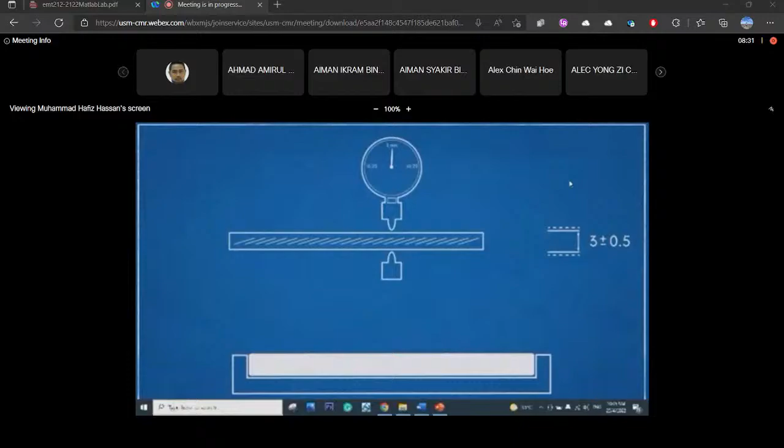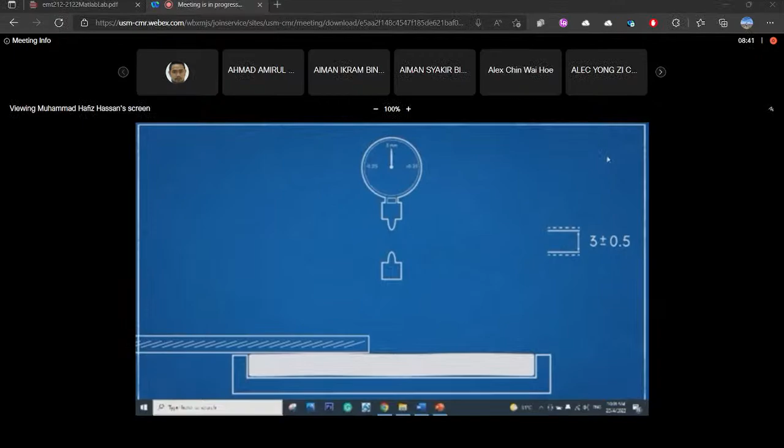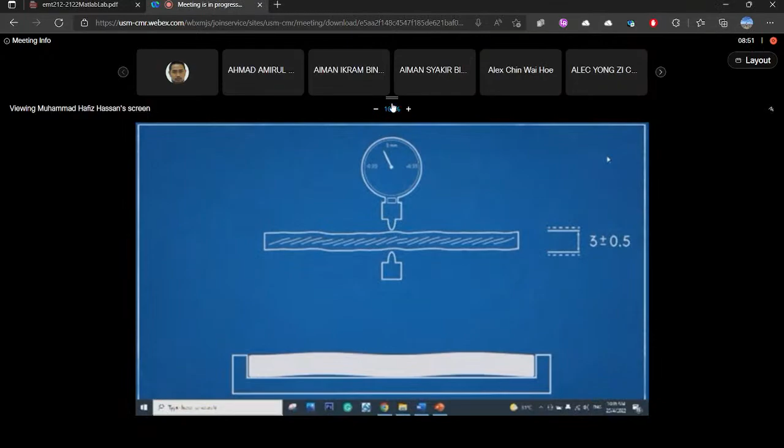As long as it is 3 millimeters thick plus or minus the specified tolerance, the sheet passes. But what if during the process of moving the floating ribbon of molten glass, a subtle disturbance is introduced to the molten metal? Let's say this disturbance imparts a quarter of a millimeter wave-like undulation throughout the entire ribbon. Now to the eye, the cut sheets would appear flat and would pass quality checks for thickness, but the surface of those sheets of glass are far from flat.

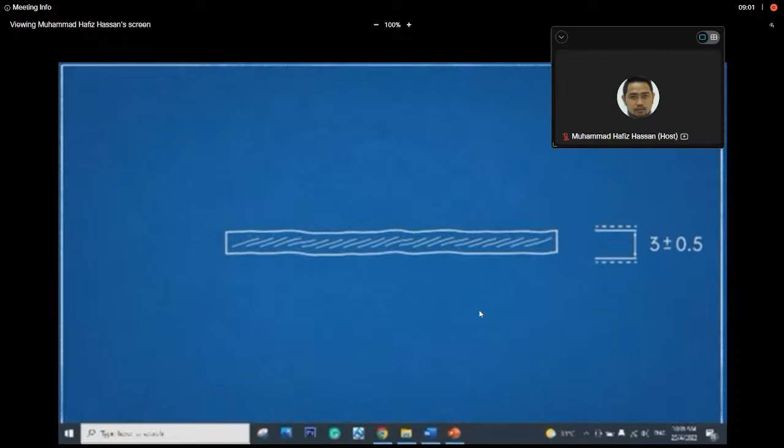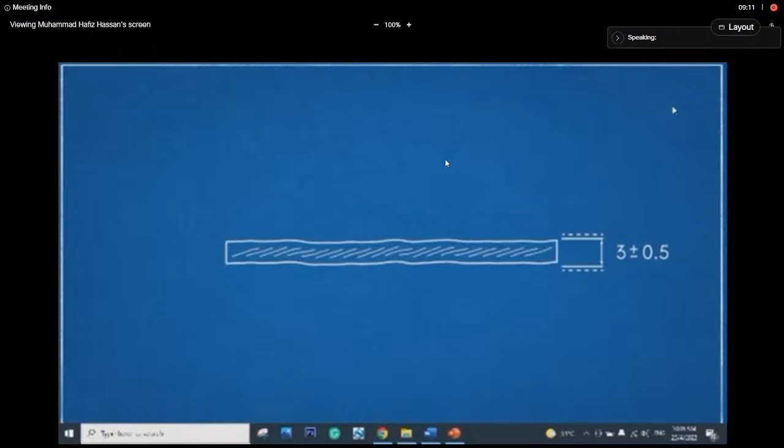Flatness isn't derived from how closely a part matches its specified dimensions. It's a property completely independent of the part's gross shape. Parts can be made completely dimensionally compliant, yet still lack flatness on its features. Because of this, the flatness of a surface is specified independently of other dimensions.

If we take a surface and sandwich it between two imaginary parallel planes, the gap between the planes that encompass the surface is known as a tolerance zone. The distance between planes in this tolerance zone is how flatness is specified. The smaller this distance, the flatter the specification. If the surface's irregularities can't fit within the tolerance zone, it's not flat enough for the specification.

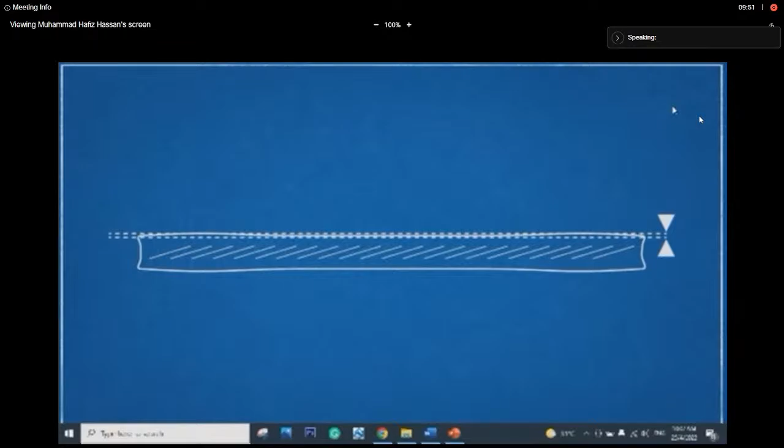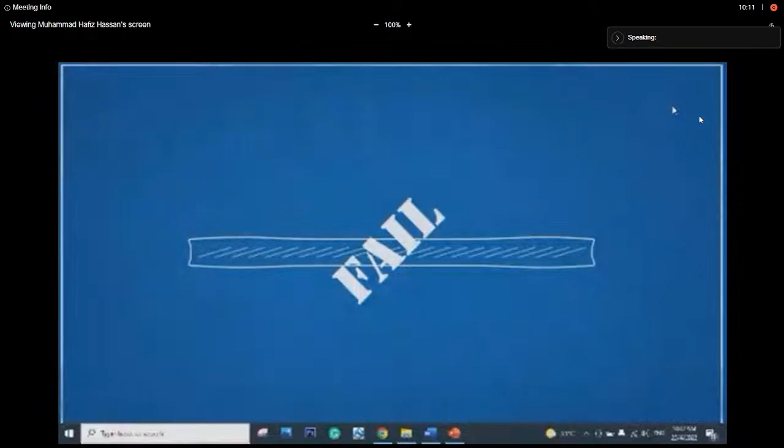Flatness is in effect the difference between the highest and lowest point of a surface and its relationship to a specified tolerance zone. It is possible to force flatness on a surface without explicitly specifying it by tightening the dimensional tolerances of a part. For example, if we made the thickness tolerance of our float glass to be plus or minus 0.1 millimeters, it would cause the sheets affected by the undulations to be rejected during quality control. However, this practice can create dimensional specifications that may be impractical or cost prohibitive to meet for some parts.

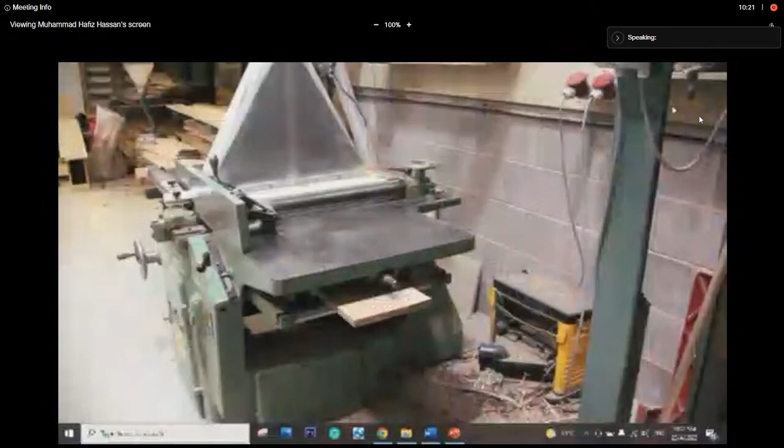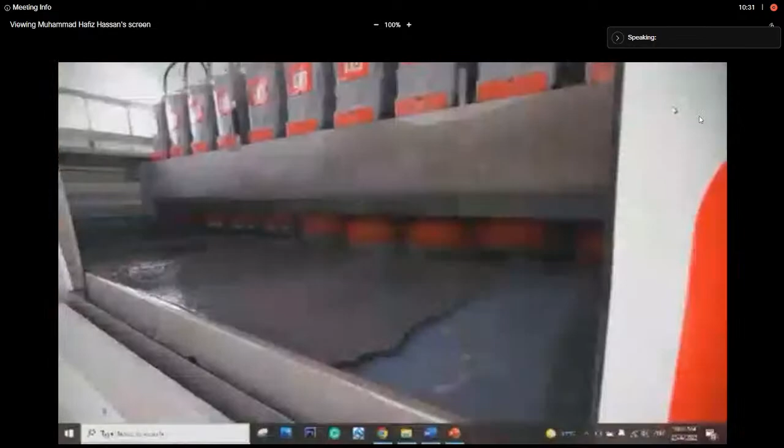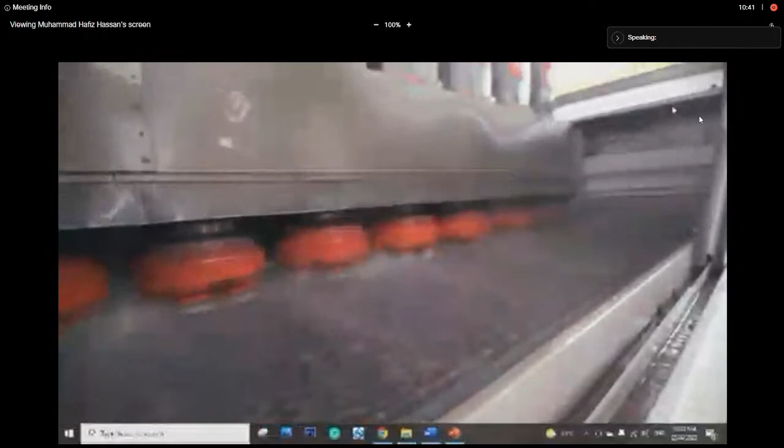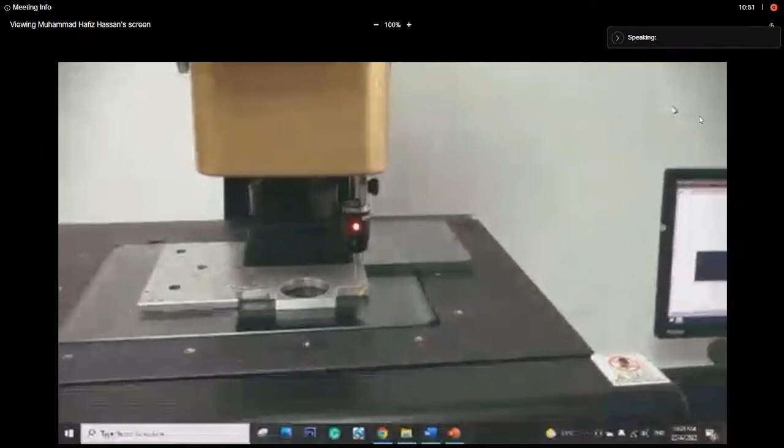On parts that do explicitly define flatness, the method of both measuring and producing flatness is determined by how tight of a tolerance zone is required. Adding to this, some specifications may even specify a maximum allowed change per area of surface, preventing abrupt changes to the overall flatness of the entire surface.

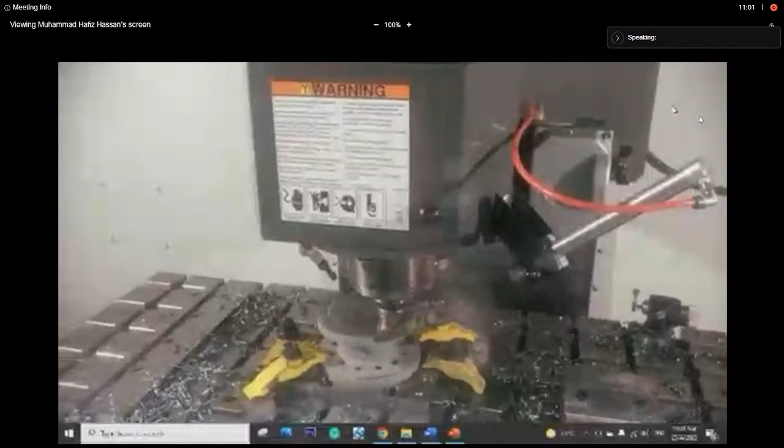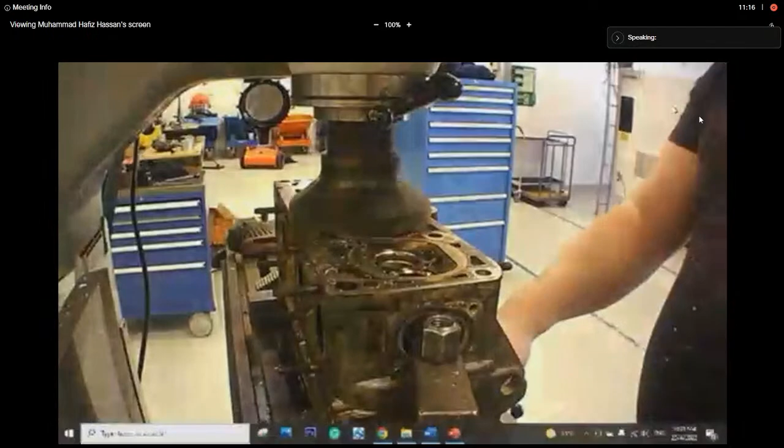Flatness specifications down to around 10 microns, or about 4/10,000ths of an inch, are quite common in machinery, found predominantly on part mating surfaces. At these tolerances, traditional milling can be used. For larger faces, tooling designed for milling flat faces such as face mills and fly cutters are common. Those mating and sealing surfaces found in car engines can be found at this level of flatness.

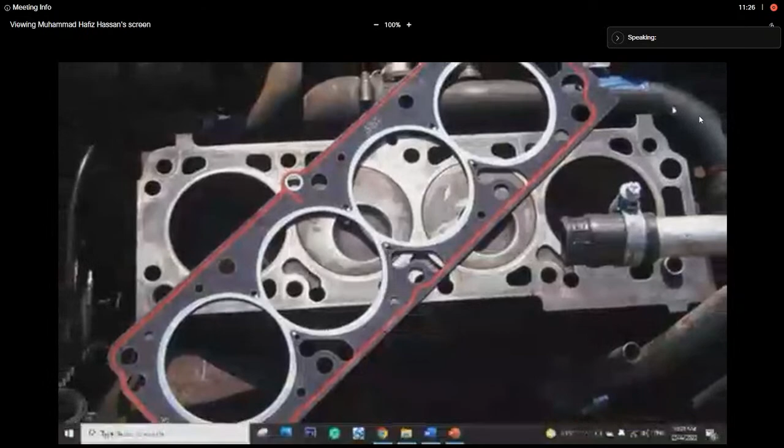Sealing in fluids at this level of flatness requires the use of a gasket. A gasket is a mechanical seal which fills the space between mating surfaces while under compression. Gaskets allow for less than perfect mating surfaces on machine parts where they can fill irregularities. They are usually made out of compressible materials such as paper, rubber, silicone, or metal.

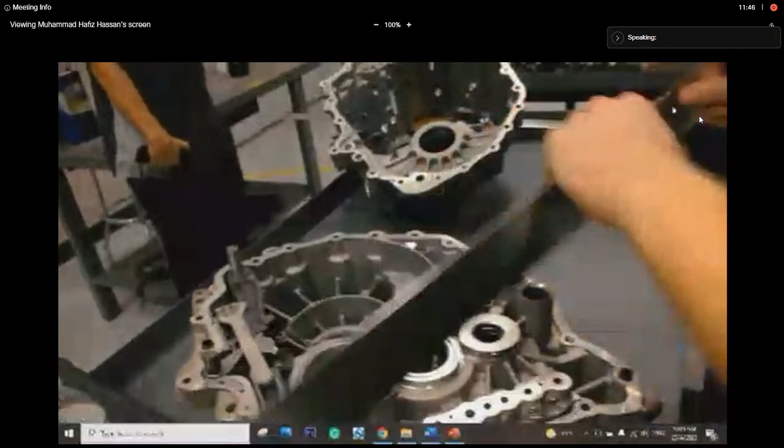Field testing flatness at this level is done with a known precise flat edge and clearance probing tools such as feeler gauges. The flat edge is placed at several positions spanning the surface to be tested, and a feeler gauge at or above a maximum allowed deviation from flatness is used to probe the clearance between the surface and the flat edge, offering a simple part usability flatness test.

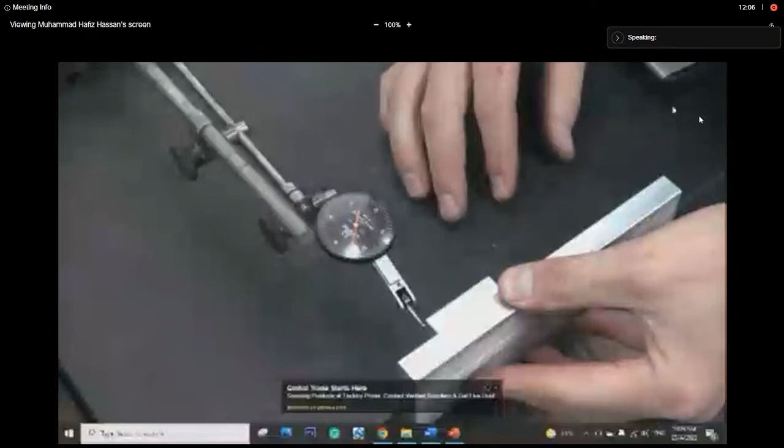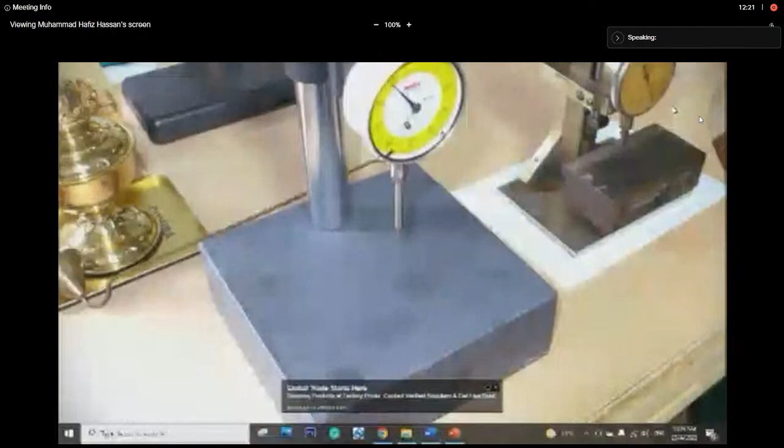Actually measuring the flatness of a surface is a lot more complicated. An obvious solution would be to measure the surface against a flat reference. For example, if a part has a surface parallel to the surface to be measured, it could be placed on a surface plate. A surface plate is a flat plate used as the main horizontal reference plane for precision inspection.

A height gauge can be used to probe the top of the surface for flatness relative to the surface plate. However, the problem with this method is that you're really only testing how parallel the surface is to the surface plate and not actually testing for flatness. Furthermore, not every part can be fixtured in this method. Because flatness is a property that's independent of other dimensions, it must be measured in an independent manner.

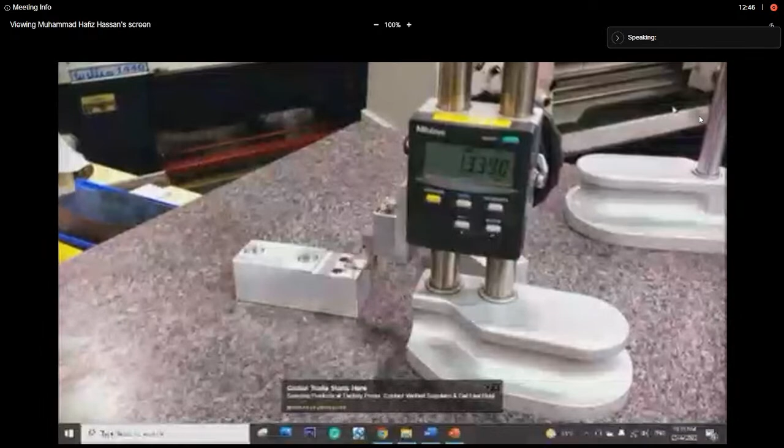If we first place the part to be measured upon 3 columns with adjustable heights, then with a height gauge run the probe along the surface while looking at the amplitude of the probe needle, we get a snapshot of the differences between the highest and lowest point on that surface.

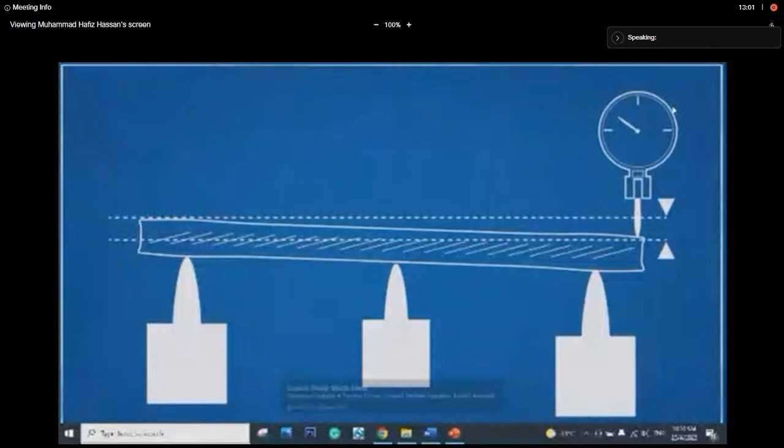We then adjust the 3 columns to minimize the amplitude of the needle. The goal is to adjust the orientation of the plane in order to come up with the smallest difference between the high and low spots on the surface. This smallest possible range of travel is the measure of the flatness of our surface. In effect, we're reconstructing the tolerance zone sandwich of the surface.

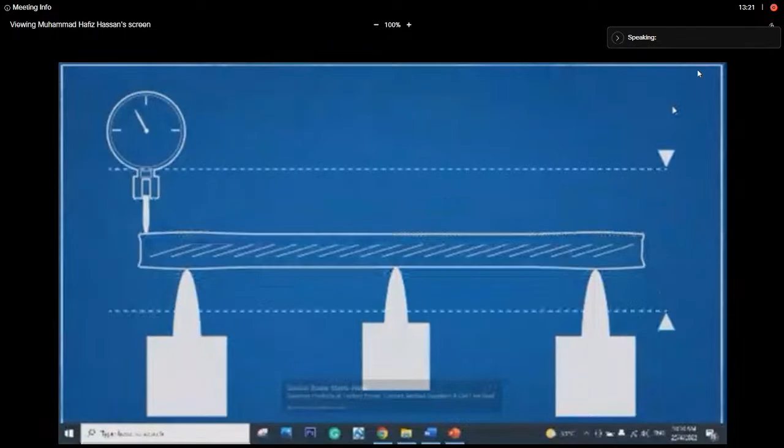Measuring flatness manually requires significant training and experience, and it can be a very tedious procedure. Automating the process with the use of a coordinate measuring machine, or a CMM, is a common practice.

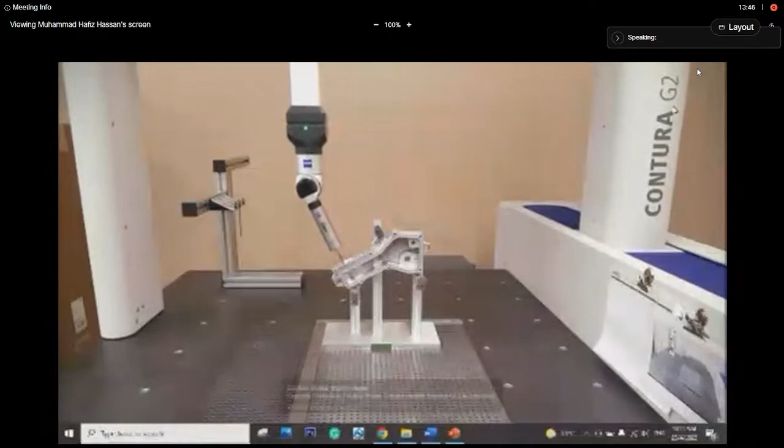A CMM is a device that measures the geometry of a physical object by sensing discrete points on the surface of the object with a probe. CMMs are typically computer-controlled and can be programmed to perform the tedious, repetitive measurements needed to determine surface flatness. The probe is programmed to sample the location of the surface within the CMM's working space at numerous points.

The resulting data, known as a point cloud, is then processed through an algorithm known as the minimum zone method. Two theoretical planes are calculated that best sandwich the point cloud, effectively determining the tolerance zone of the surface.

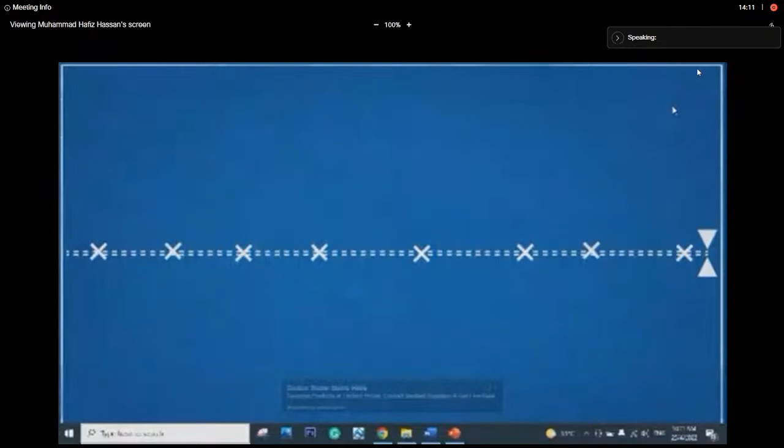Because the aligning of the surface is done in software, measuring flatness with a CMM can be done very efficiently with minimum fixturing. CMMs are generally accurate down to about 2.5 microns, or 1/10,000th of an inch, making them ideal for use with milled flat surfaces.

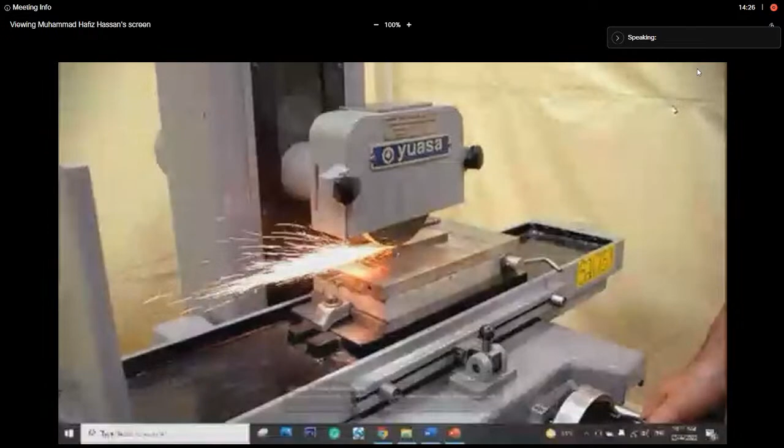Going beyond the 10 micron level of flatness requires the use of surface grinding. It's a widely used abrasive machining process in which a spinning wheel covered in rough particles cuts chips of metallic or non-metallic substances from a workpiece, making it flat.

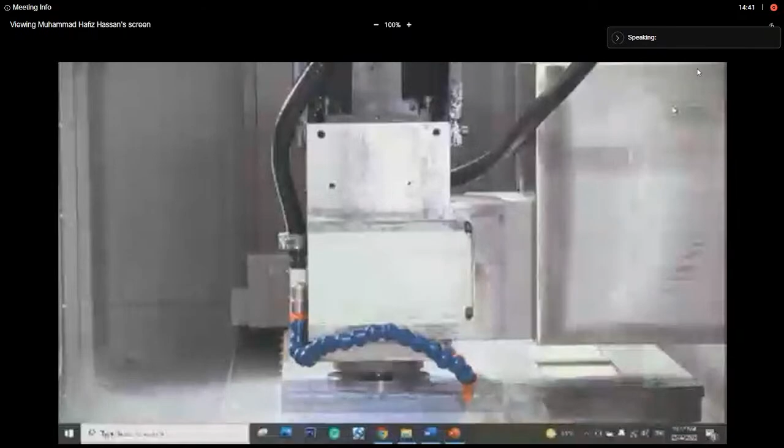Grinding is commonly used on cast iron and various types of steel. These materials lend themselves to grinding because they can be held by the magnetic chuck commonly used on grinding machines, and they do not melt into the wheel, clogging it and preventing it from cutting.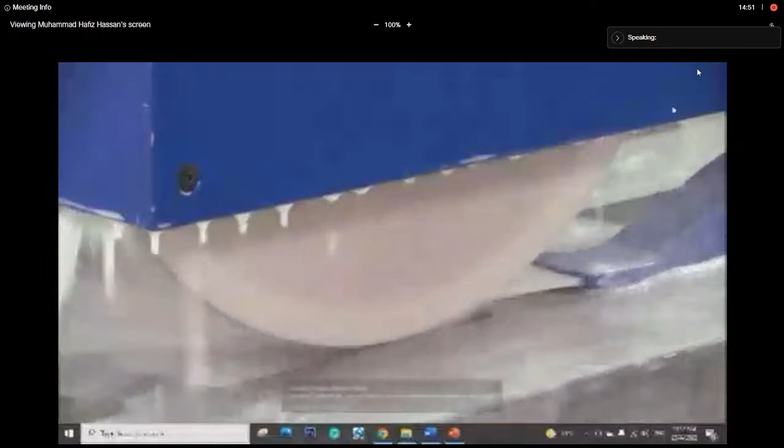Surface grinders can easily produce flat finishes down to about 2 microns of surface variance. This process is typically used to produce precision parts, precision fixtures, measurement equipment, and tooling.

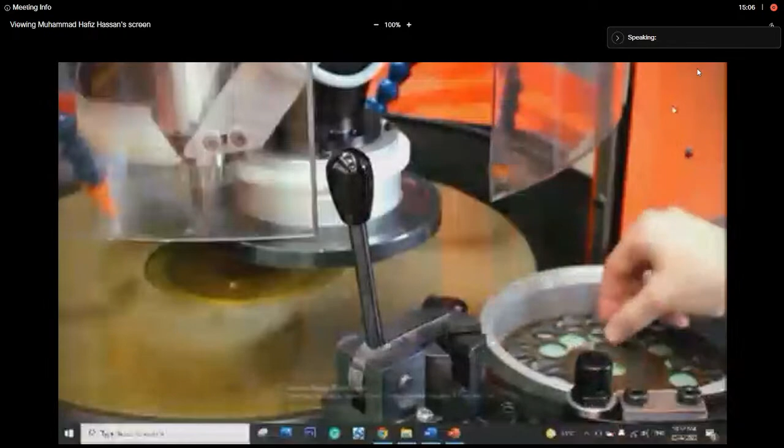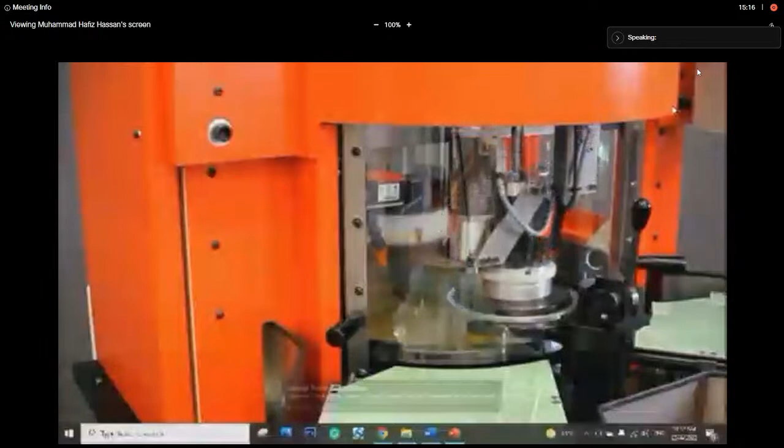Similar to grinding, face honing is a process in which a large working wheel with a thin layer of abrasive is used to grind workpieces held in a carrier disc. Face honing allows for the grinding of multiple small parts at once and is commonly used for ceramic tooling inserts, watch windows, LED wafers, bearing rings, gears, cutting knives, and carbide tooling.

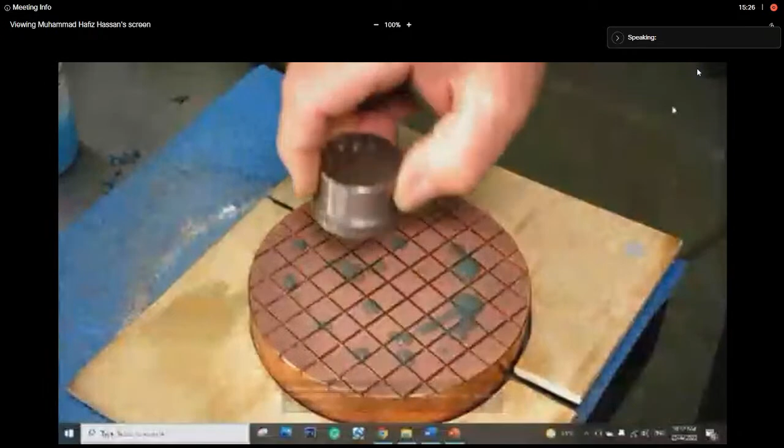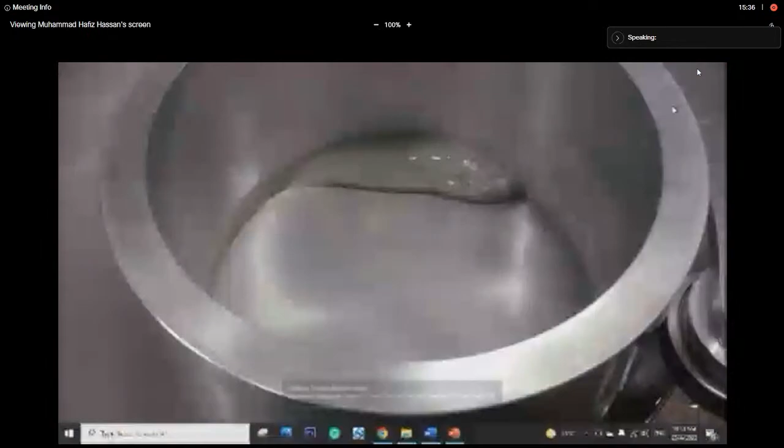When extremely flat surfaces are required beyond what grinding is capable of, lapping is used. Lapping is the process of rubbing two surfaces together with an abrasive between them in order to remove material in a highly controlled manner. In lapping, a softer material known as a lap is charged with an abrasive.

The lap is then used to cut a harder material. The abrasive embeds within the softer material, which holds it and permits it to score across and cut the harder working material. Lapping can be used on a range of materials from metals to ceramics and glasses.

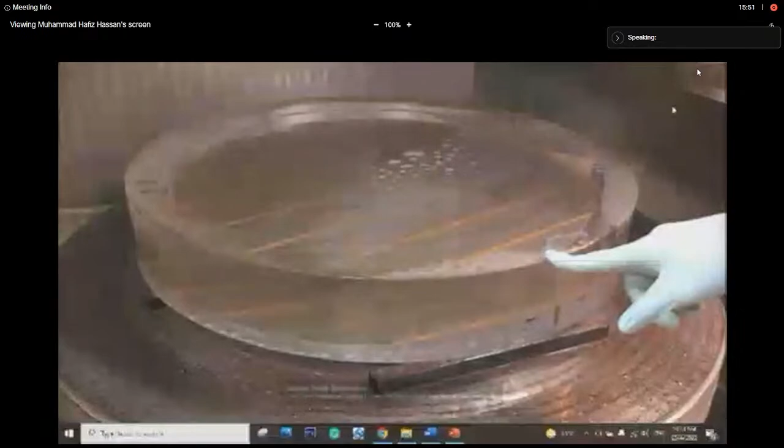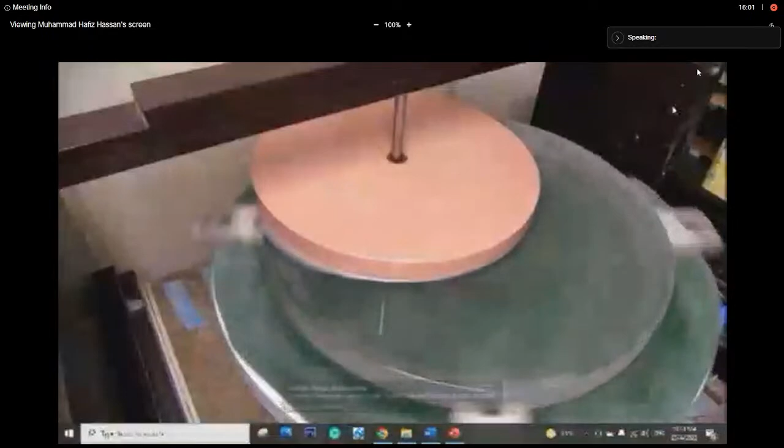At its limit, lapping can produce surfaces that vary by only 30 nanometers, or about the height of 300 hydrogen atoms. It can be performed by specialized machines or by hand, and the process can accommodate sizes from tiny handheld parts all the way up to large optical pieces found in telescopes that can take months to produce.

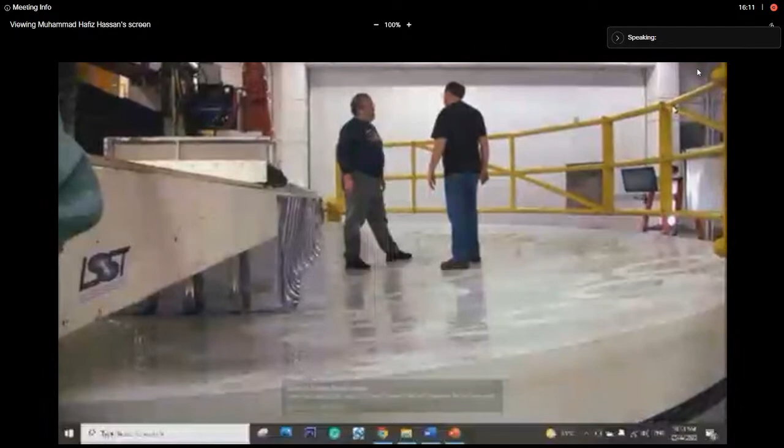A curious phenomenon that occurs when surface flatness approaches 1/10 of a micron is called wringing. Wringing is the sliding of two ultra-flat faces together so that their faces lightly bond. When wrung, the faces will adhere tightly to each other, requiring a significant amount of force to separate them.

The exact mechanism of why this occurs is unknown, though it's believed that molecular attraction starts to occur when the two very flat surfaces are brought into contact. As flatness gets into the nanometer scale, the force-reducing effects of surface roughness are removed, and full contact bonding actually becomes possible purely by intermolecular forces such as van der Waals forces, hydrogen bonds, and dipole interactions.

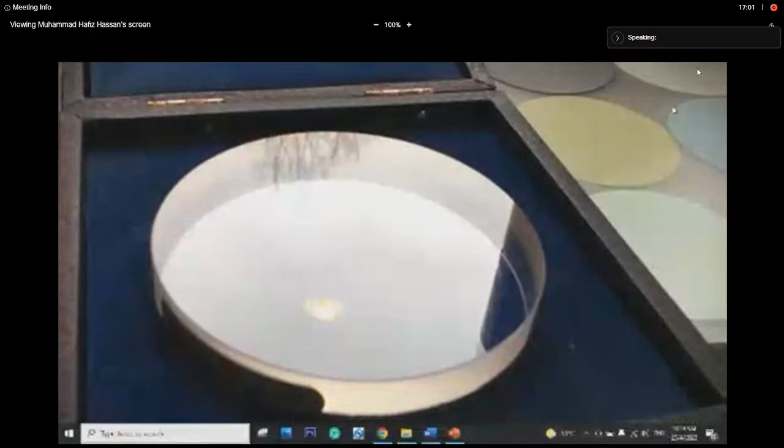This technique is used in an optics manufacturing process known as optical contact bonding. Measuring the incredibly small surface variances at this level of flatness is nearly impossible to do with direct surface contact, so optical methods are used.

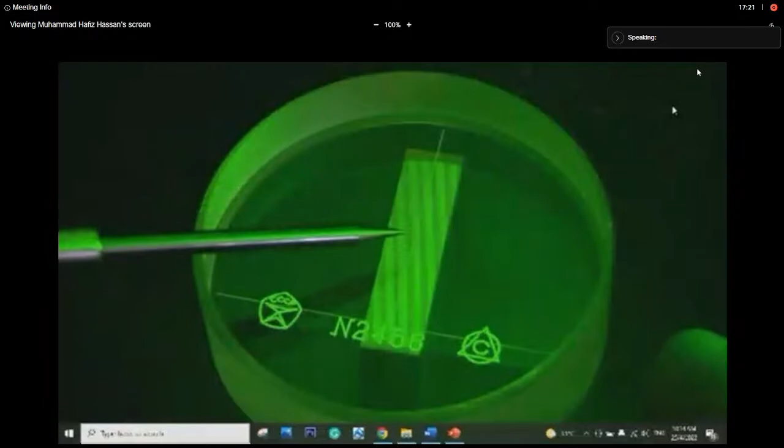In order to accomplish this, the interference pattern created by light reflecting off the surface to be measured is used. This is done by using a special precisely polished flat lens known as an optical flat and a monochromatic light source of a known wavelength. Common sources are low pressure sodium lamps or a helium neon laser.

When an optical flat's polished surface is placed in contact with the surface to be tested, dark and light bands are formed when viewed with monochromatic light. These bands are known as interference fringes, and their shape gives a visual representation of the flatness of the surface being tested. The surface flatness is indicated by the amount of curve and spacing between the interference fringes.

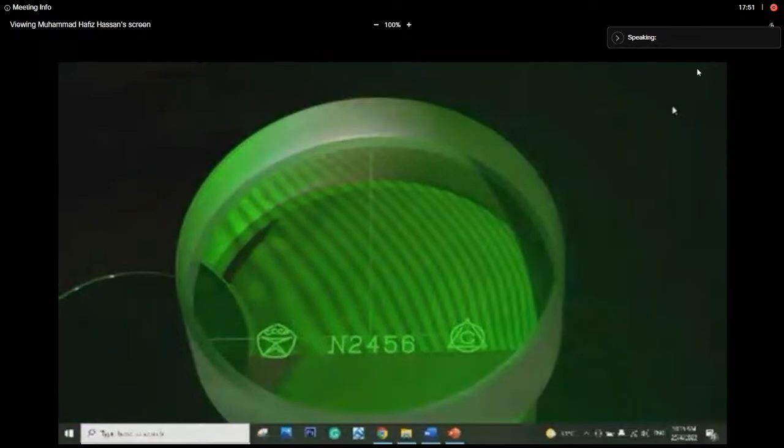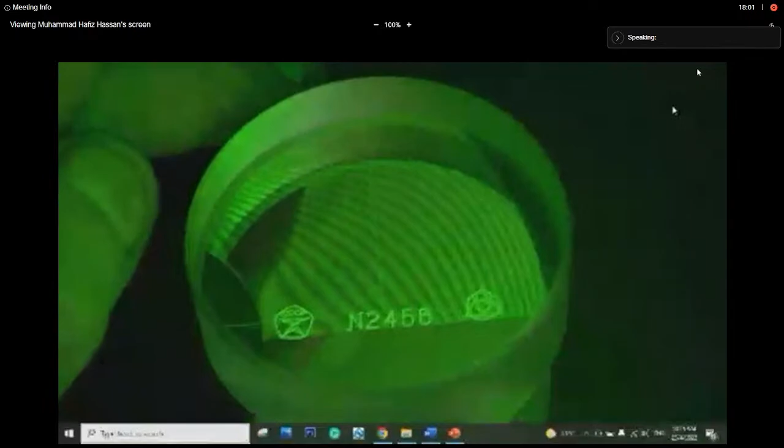If an imaginary line is run through the optical flat, each band of curved interference fringe it intersects represents a half wavelength of variance in the surface at that region. For example, if the light source has a wavelength of 600 nanometers and the imaginary line intersects 3 bands, the surface flatness for that area varies by 900 nanometers.

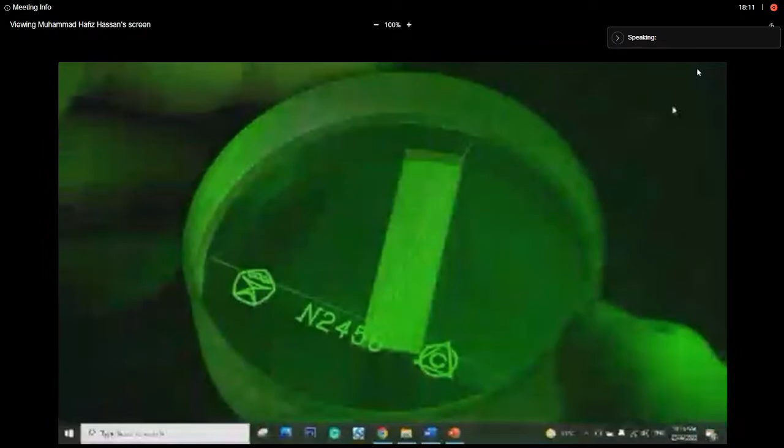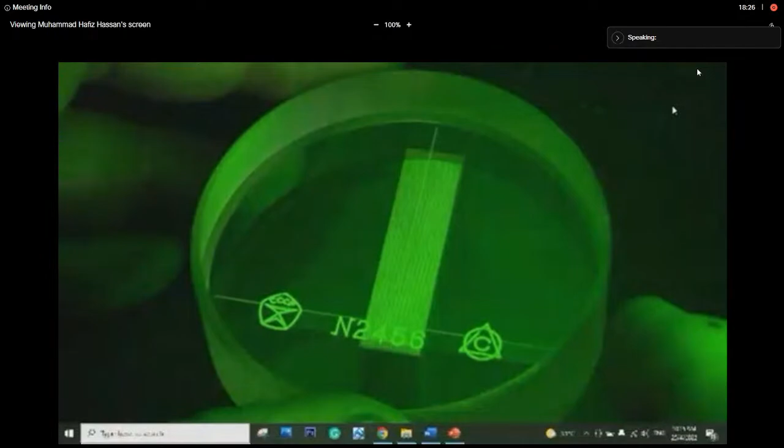Furthermore, the direction of the curves represents whether the surface is concave or convex. Straight, parallel, and evenly spaced interference fringes indicate that the work surface flatness is equal to or higher than that of the reference surface. Some optical flats can even create band divisions anywhere from 1/4 of a wavelength down to 1/20th of a wavelength, allowing for flatness resolution down to about 30 nanometers.

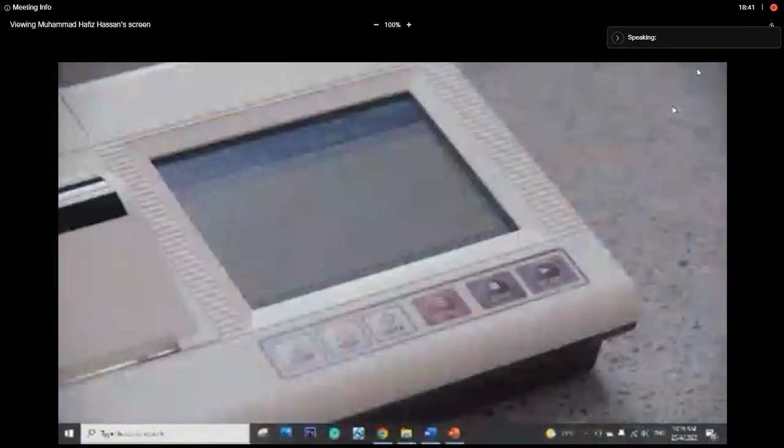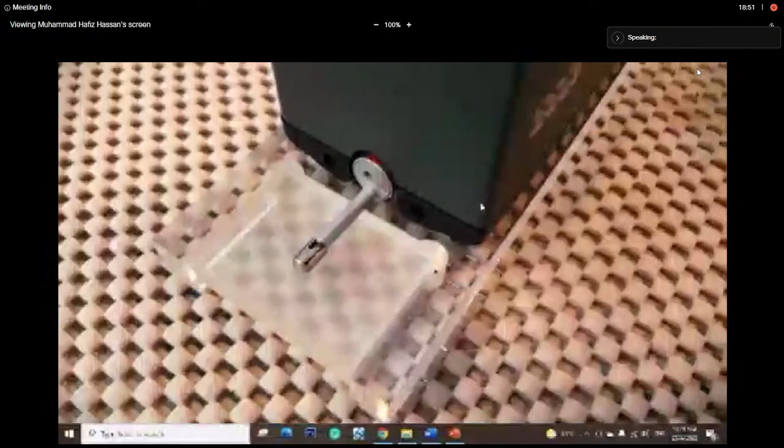Both grinding and lapping can be used to achieve a subtly different property of surfaces known as surface roughness. Surface roughness, like flatness, is based off the peaks and valleys of a surface. Surface roughness, however, measures how much the average of a surface's variance deviates from the intended surface. Surface roughness can also be specified for any shape, not just flat surfaces.

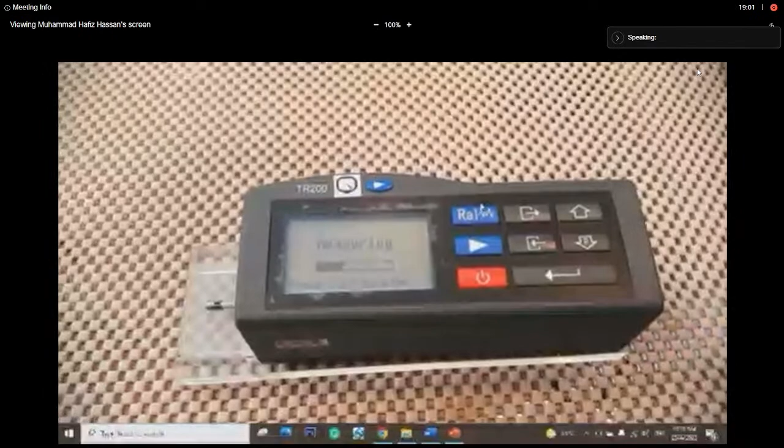In general, surface roughness specifications are far smaller than those for flatness. They typically exist in the submicron range, but as flatness variance approaches extremely small levels, the two properties may begin to converge. Perfect flatness near or at one atom of variance is possible but is beyond the scope of mechanical means.

At these levels, mechanical flatness gives way to chemical deposition and thin film technologies. Direct manipulation of atoms with scanning tunneling microscopes can even achieve perfect surfaces by manipulating them one atom at a time. At these scales, the definition of flatness quickly becomes moot.

Okay class, I think we only have 15 minutes. So I just want to summarize what flatness and straightness are according to the video I just showed. So just a very brief overview of the topics today.

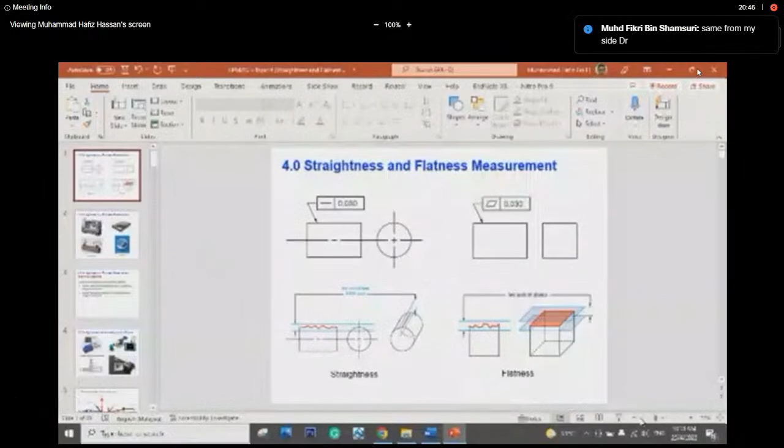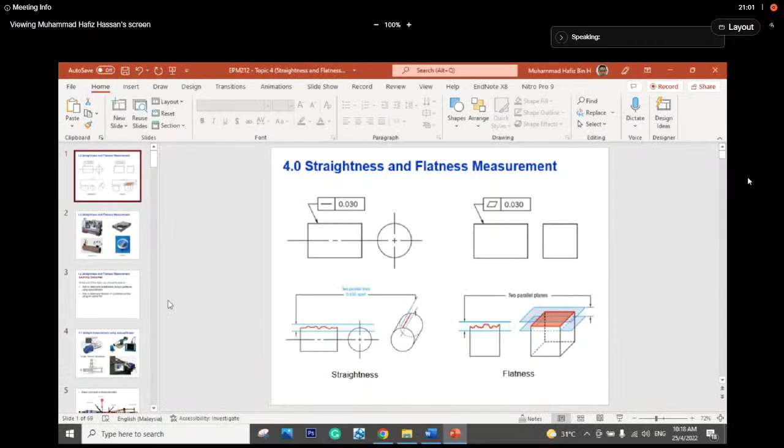So for today, I think I cannot upload the file yet, so just a brief regarding this because at 8:30 to 10:30 we will do a quiz. So for this topic, you already know the flatness and straightness according to the video just now, so why straightness and flatness are very important to the applications that we want to produce.

For example, like gaskets, to produce a part very flat in order to make sure that they don't have any leakage or something like that. So that is what flatness and straightness means.

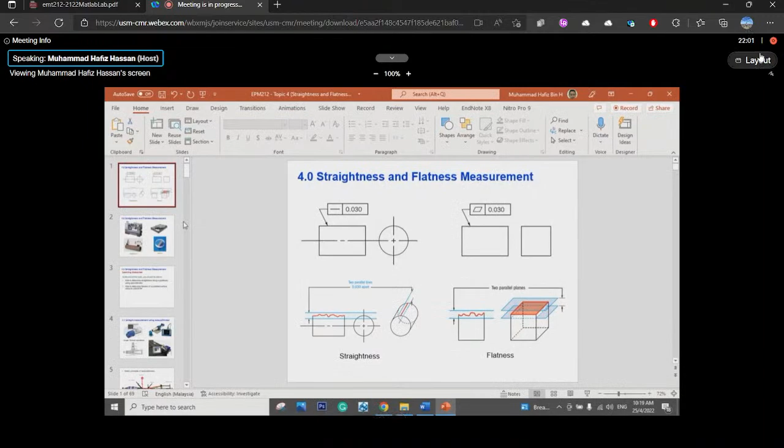So from the video also you know what is the process that you have to do in order to achieve the flatness surface that you want to produce.

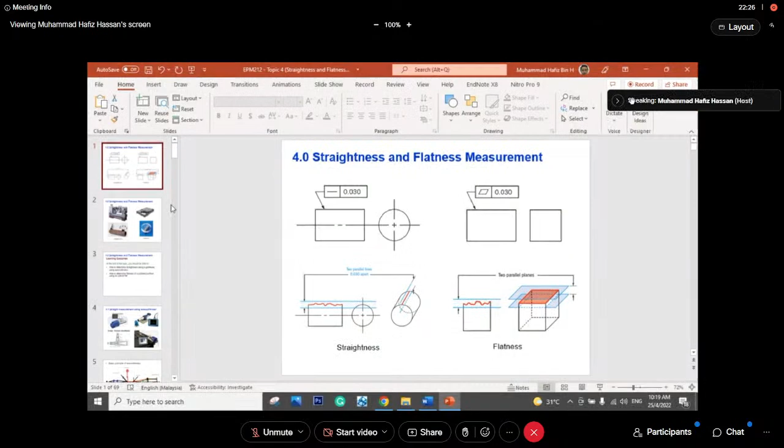At the same time, at the end of the video just now, they only come up with the surface roughness. So you can see the relationship between the surface roughness and also flatness or straightness in your application. So if the surface roughness of the surface is really high, it will affect the flatness.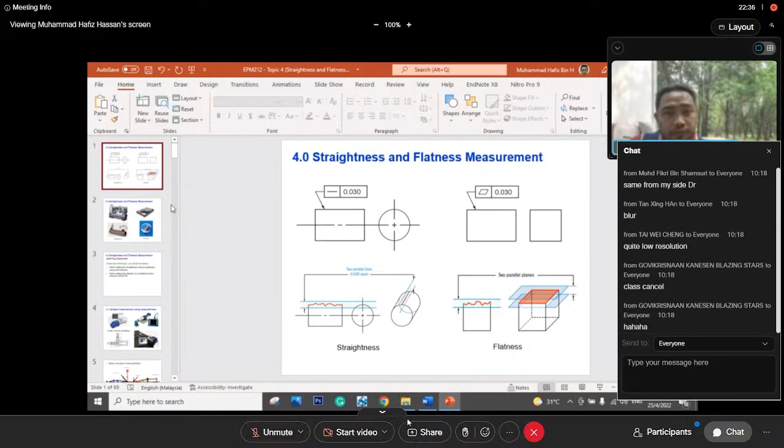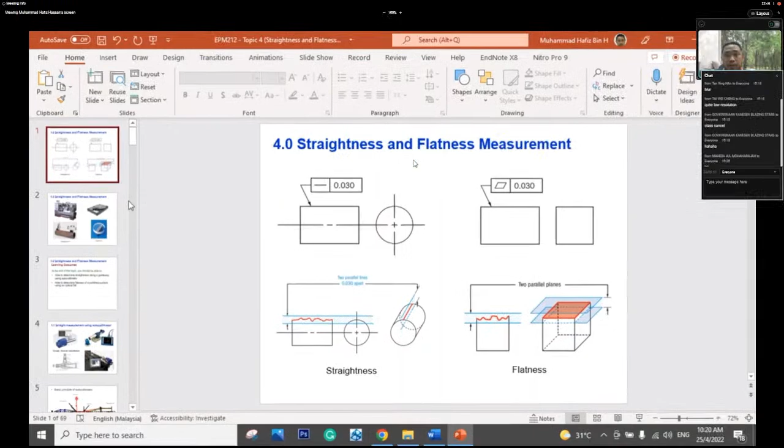That's why the flatness and surface roughness are interrelated to each other, so you have to know how to produce a very good part according to flatness and surface roughness. So according to the video just now, they have a milling process and polishing - all this process is to produce a very flat surface.

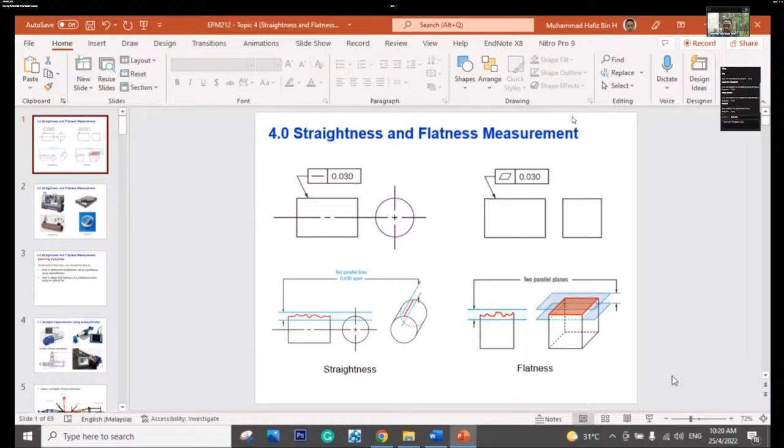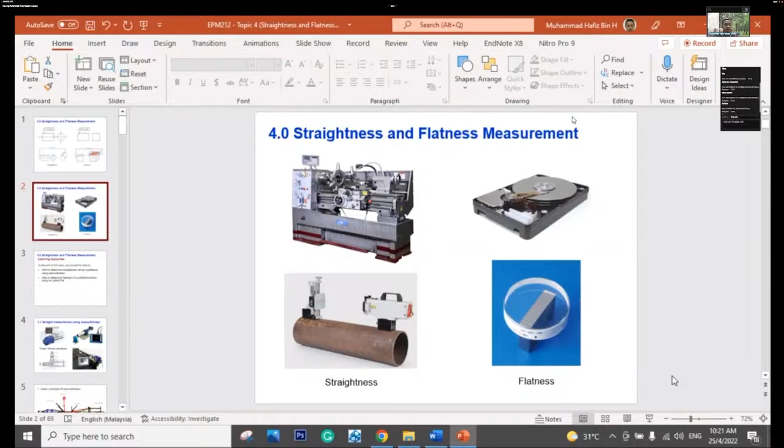In order to achieve a very good surface finish in terms of roughness and also flatness, in this topic, topic 4, we will discuss straightness and flatness measurement. You have to understand what is meant by straightness and what is meant by flatness. Then topic 5, we go with surface roughness.

So from here we can see they have roughness and roundness - that is topic 5. Then we complete my part on the metrology part, and next we proceed with quality control with Dr. Ramza.

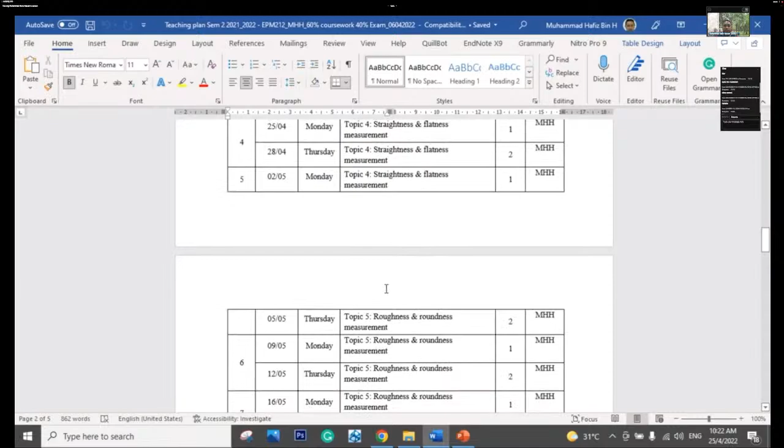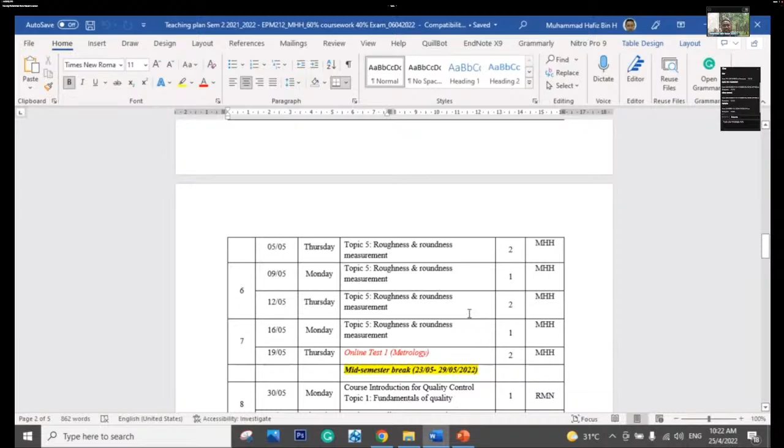I'm not sure whether you have a chance to try it, since now we are in online mode. I really hope that you can imagine how it's done, because you have to understand how the autocollimator operates for the measurement of straightness, and how the optical flat measures flatness.

So what to do - now everything is online, so you have to know without practically applying it. I will try my best to explain it with video demonstrations or something like that. Hopefully we can have the stations, maybe talk to technicians, and then we can do it live.

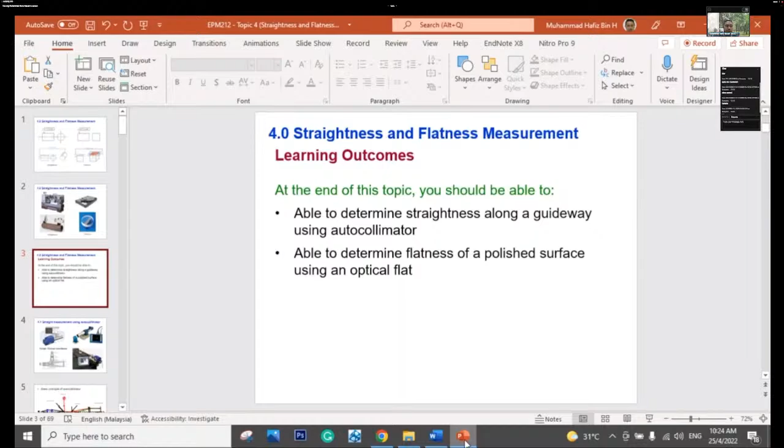I think this machine is already broken here. I'm not sure whether they have done maintenance on that. So if you come here also we cannot do it, but I can explain it through the video, and how the autocollimator will make sure that your part is measured for straightness.

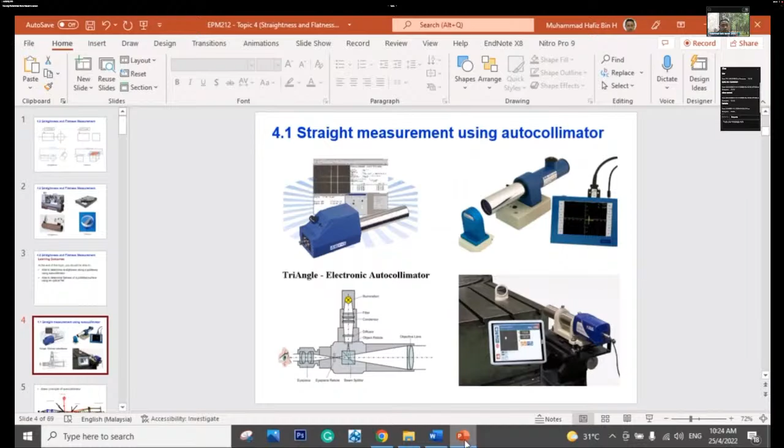This is the basic principle. I will explain it in detail regarding the autocollimator on Thursday.